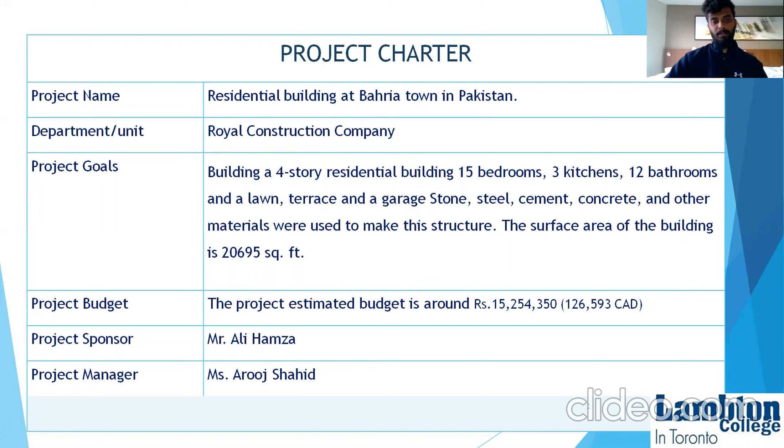The estimated budget of the project is around 1 crore 52 lakh 54,350, which is around 1,26,593 Canadian dollars. The client or sponsor of the project is Mr. Ali Hamza. The project manager or construction manager of the project is Ms. Arooj Shahid.

Let's move to the project purpose. It is a 4-story residential building located at Bahria Town, Karachi, Pakistan. The main contractor is Royal Construction Company and the budget is around 1,26,593 Canadian dollars. The project scale, budget, goals, implementation plan, critical risk and reduction measures are all outlined in the project charter as you saw earlier.

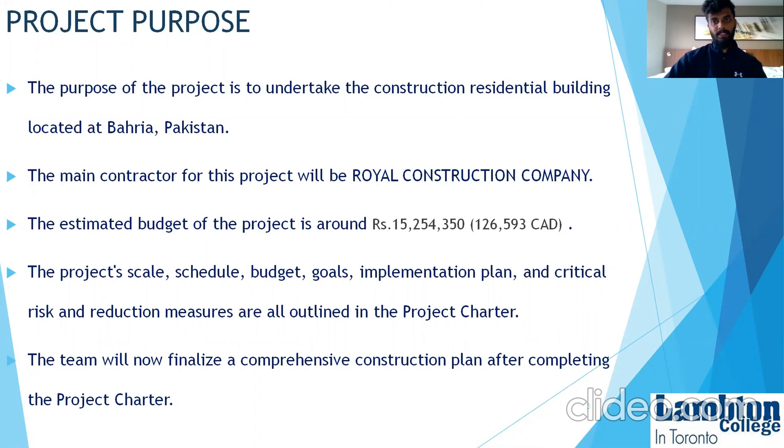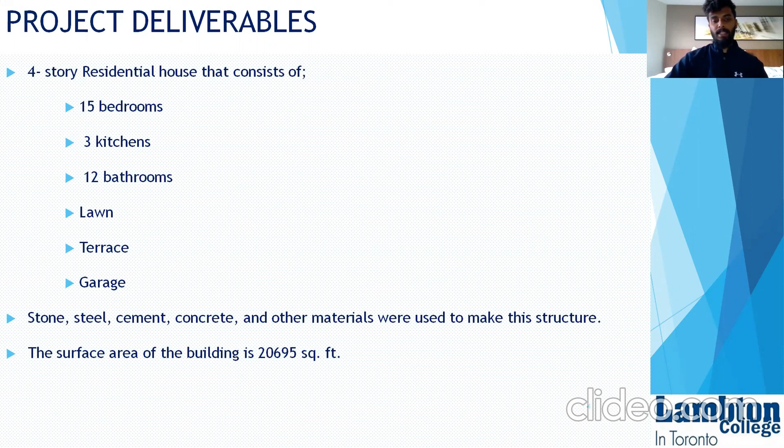The 4-story residential house consists of 15 bedrooms, 3 kitchens, 12 bathrooms, a lawn, terrace and a garage. The materials used to make the structure are stone, steel, cement and concrete. The surface area of the building is around 20,695 square feet. Let's move to the assumptions and constraints.

At various stages of the project, energy, manpower, and raw materials will be provided by the contractor. It is the responsibility of the contractor to provide these, as well as to obtain building permits. It is anticipated that raw material cost will not escalate more than 10%, and it is necessary to complete this project on schedule. After each stage is completed, the project manager must notify the customer.

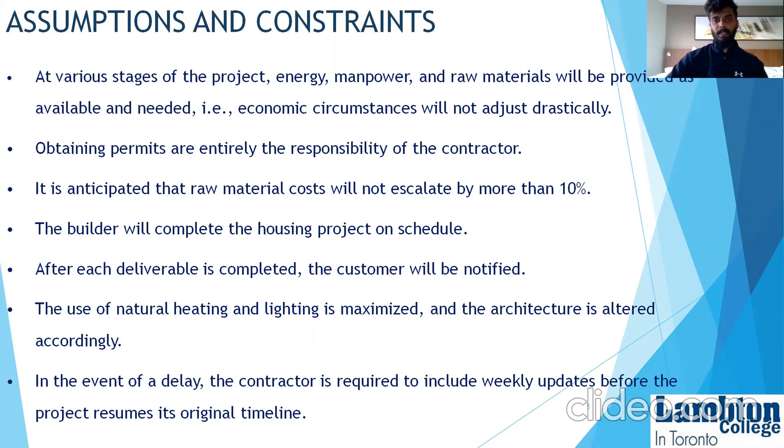According to the natural heating and lighting, the architecture of the building is altered. Construction materials and tools used for the project are located on the job site. The initiative is open to skilled contractors, and all participating contractors aim to reduce noise transmission near the plots. Barriers should be placed around the construction site perimeters to reduce noise around the site. The building work should be completed within the time frame established by the local municipality.

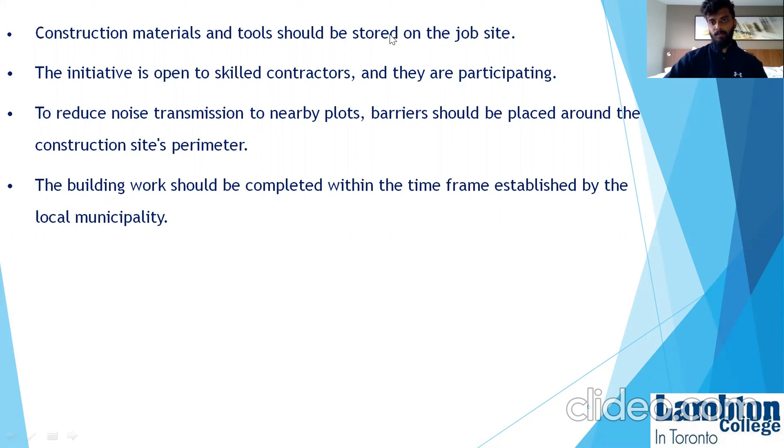Hello guys, my name is Abhijit and I will be presenting the high-level project description, the risks, and the project boundaries. The title of the project was construction of a residential building located at Sindh in the state of Bahria in Pakistan. The sponsor of the project was Mr. Ali Hamza, and it was a design-bid-build delivery system undertaken by a company named Royal Construction Company. The location of the project, as I said before, was at Sindh in the state of Bahria in Pakistan.

It was a lump sum project deal. The budget of the project was about 1,26,593 Canadian dollars, and the estimated duration was around 1 year. The site area for the project was about 25,000 square feet.

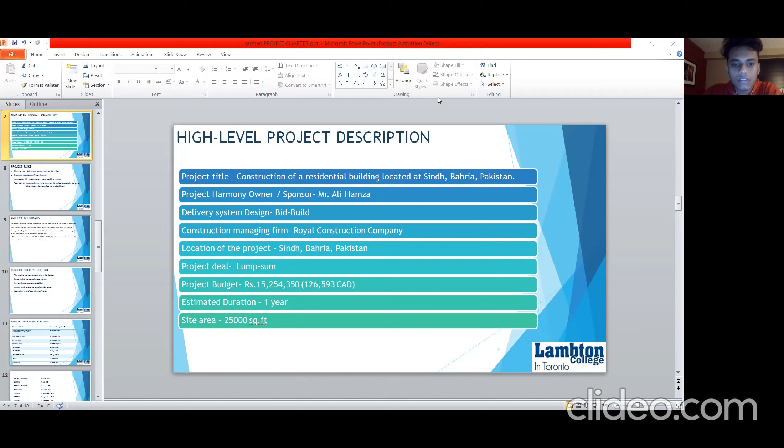Now coming to project risks. Initially, they had to consider the financial risk, categorized as a high-level risk, as the project might exceed the estimated budget. The second was execution risk, a medium-level risk, in which scenarios like occurrence of a fire or burglary were considered. The third is contractual risk, in which delay in getting the building permits approved was considered, categorized as a medium-level risk.

Finally, they had to consider technical risk, in which cases like amendments in the plan while the project is ongoing by the owner, and viable mistakes done by skilled and unskilled laborers, were considered.

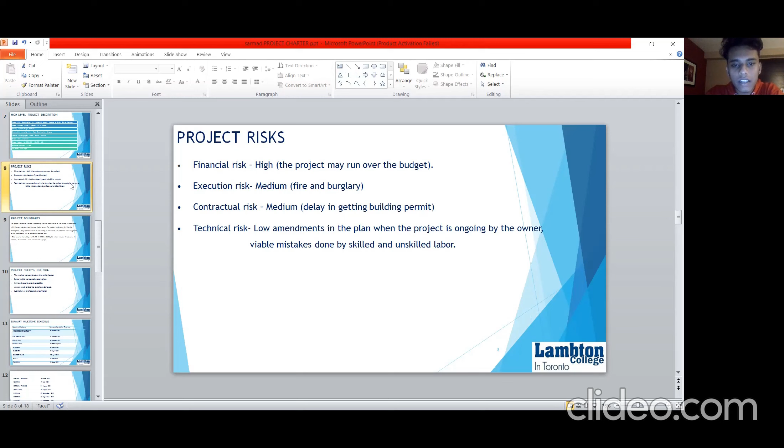Now, coming to project boundaries. The project boundaries include the clearance of site, construction of the building in accordance with the plan and design, turnover to the owner, and completing the project within the given time frame. The site development was not required in the project contract. Only the construction of the building is contracted, and any additional work or requirements suggested by the stakeholders will be outside the decided cost.

The total area for the building is about 20,695 square feet, which comprised 15 bedrooms, 3 kitchens, 12 bathrooms, a lawn, terrace, and a garage.

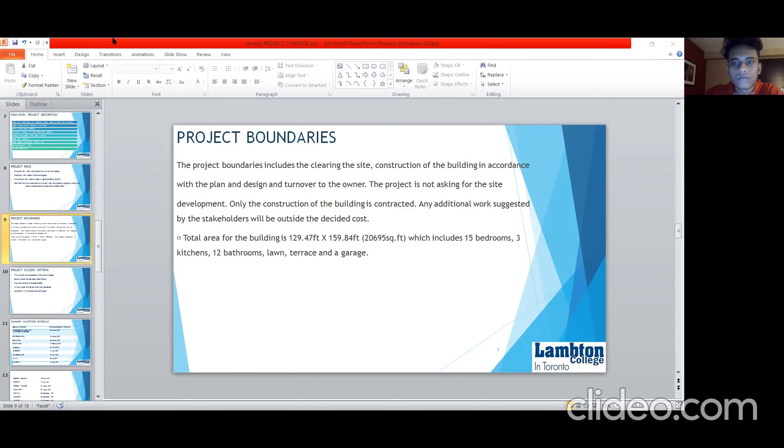Project success criteria are the standards by which the project will be judged at the end, to decide whether or not it has been successful in the eyes of stakeholders. Whatever success looks like, you have to define it so that you can own it.

There are some success criteria which were followed to make this project a success, like the project was completed on time and on budget, which is one of the most important criteria for project success. And quality assessment - quality was reviewed timely, or at the end of each phase.

Better public transportation alternatives were there so that there should be no inconvenience. Improved security and dependability - annual repair and service costs have decreased.

Lessons learned were submitted, which can ultimately help the organization to consider them while working on some other project. Stakeholder satisfaction is also one of the most important criteria for making this project successful.

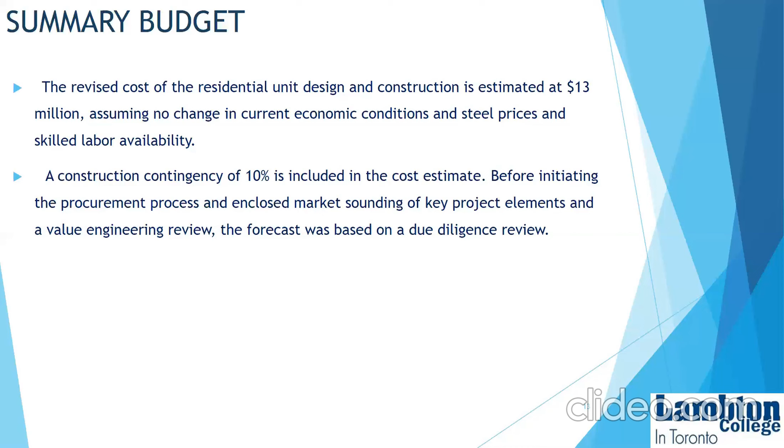So here are the works that we have undergone for our project - that means the site preparation, excavation, etc., and we can see the expenses are provided in rupees. The works include plumbing materials, concrete, roads, paint, flooring material, electrical equipment, glass, windows, wood, cement, bricks, drywall, roofing, and at last, labor.

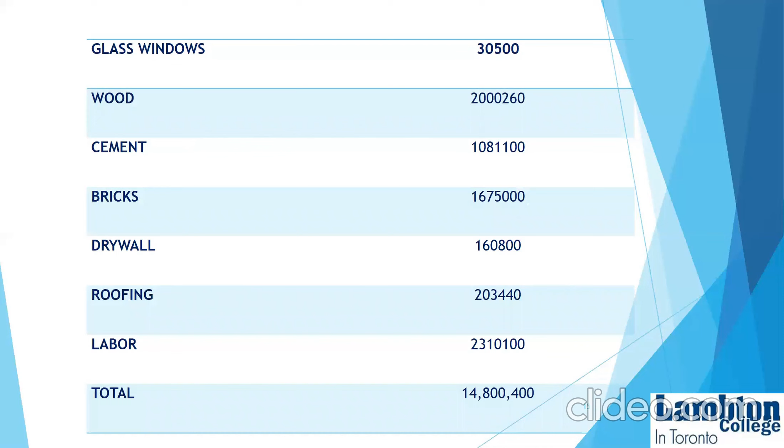Next one is the stakeholders list. A project is successful when it achieves its objectives and meets or exceeds the expectations of the stakeholders. They are individuals who either care about or have a vested interest in your project.

They are the people who are actively involved with the work of the project, or have something to either gain or lose as a result of the project.

The project sponsor, generally an executive in the organization, or can be the owner of the project, has the authority to assign resources and enforce decisions regarding the project, and he is a stakeholder. The customer, the subcontractors, suppliers, and sometimes even the government are stakeholders.

Our construction manager is Mr. Arush Shahid, and he is also a key stakeholder. The next one is the project approval requirements.

Hereby we are signing off from the project, because most projects require approval from external authorities. Those approvals will have a major impact on the project and can be explicitly stated within the project charter. The project charter, however, is not the place for a comprehensive list of approval requirements.